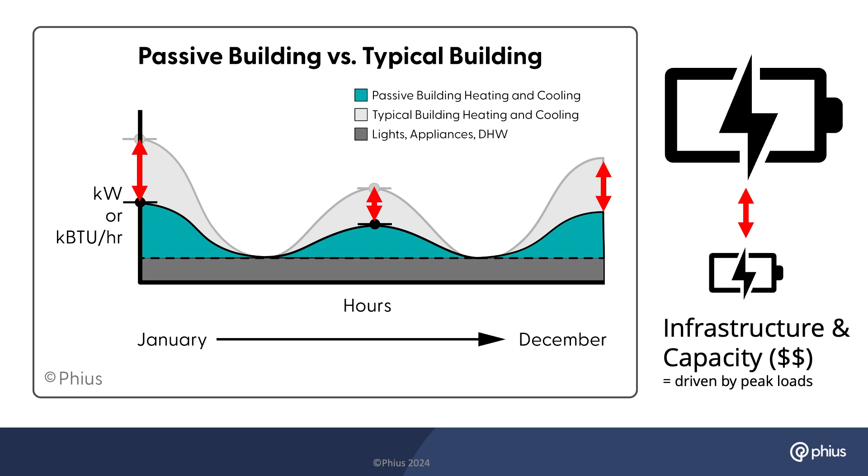So this is really the cool thing here. If we really crush all of our loads, we can feasibly scale up what we need in terms of electrons through renewable energies, and that's what we want to do. We want to crush the CO2 emissions and the cost.

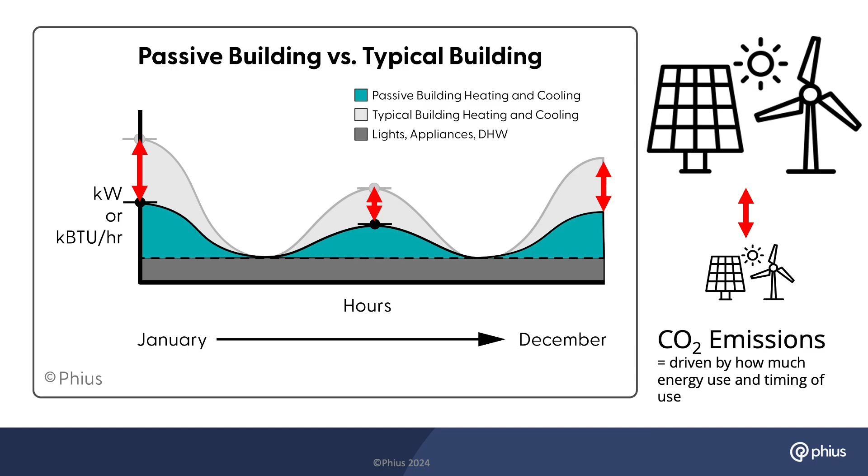I will not talk in detail about these principles. Happy to distribute this presentation later. Those of you taking this, I'm assuming it's a requirement, like systems classes, you're familiar with continuous insulation, no thermal bridges, airtight construction, heat recovery ventilation, solar gain, managing summer and winter, and picking the appropriate glazing package for your climate.

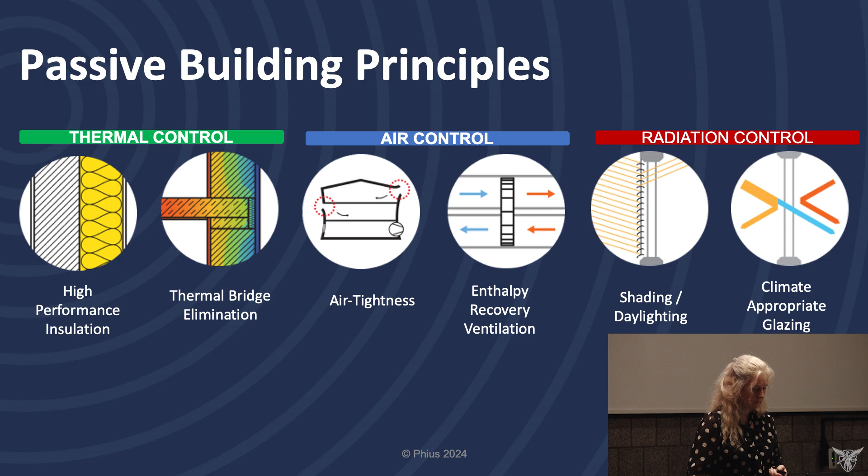Now a little bit on the certification framework, and I'm sorry I'm hitting you with this, but it's really important because if you just employ these principles I showed you by gut feeling—like, okay, tons of insulation, this window looks good—but you don't have anything that gives you a limit on the different combinations for your particular climate, you can totally overdo it or underdo it, or worse, do something that makes it even worse than intended despite good intentions.

So it's very important to differentiate between those principles. These are essentially your strategies that you can pick from, your tool set, but you also need hard and fast lines that tell you how much insulation to layer on and where to stop. This is what these targets are for. And to do this correctly, you need essentially three kinds of frameworks that limit you.

One is the space conditioning targets—by that I mean heating and cooling total consumption per year. Then the peak for heating and cooling, because that determines how big your mechanical system has to be to keep your building comfortable. And then you want on-site quality assurance. Anybody here who has built buildings before?

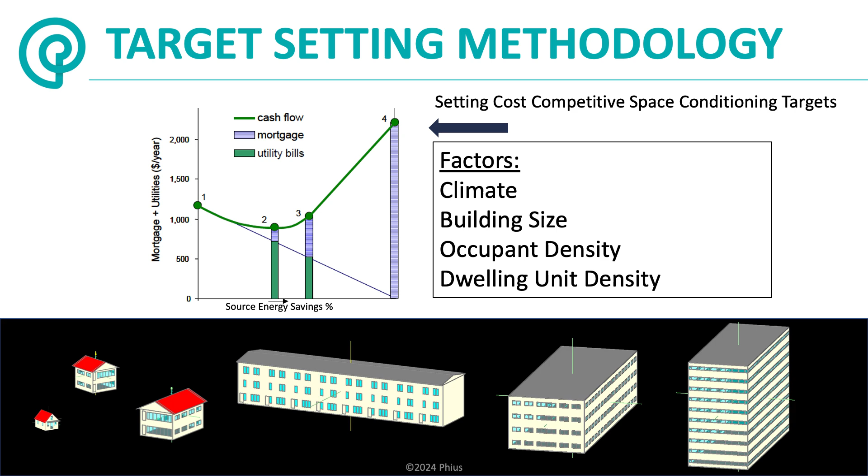Building size and occupant density make a big difference in where the sweet spot is for setting insulation levels. This is good news because the bigger the buildings—my favorite right now are high rises—the less insulation you need. You can already get very close to passive building standards with big buildings, almost at code level. It's not easy, but it is easier.

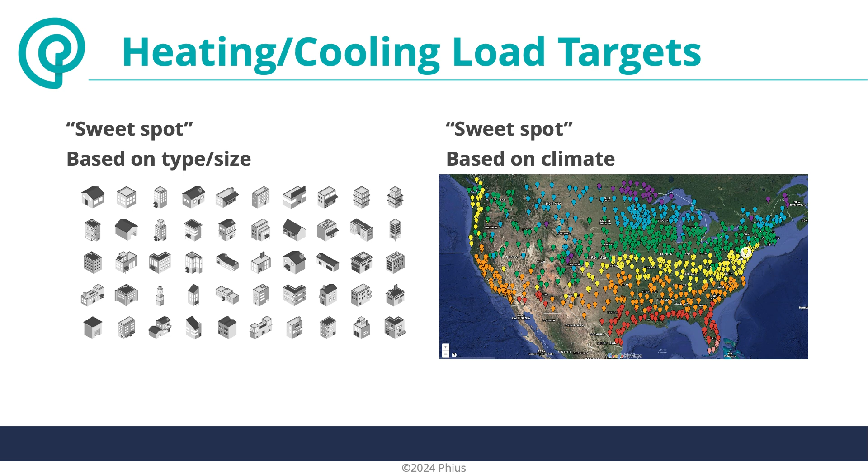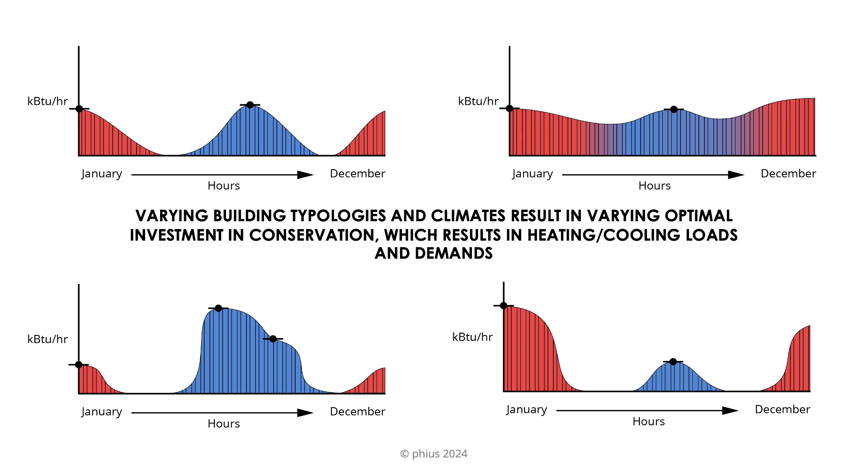Heating loads have a sweet spot based on building type and size, and we have targets for every different climate zone. That funny diagram where we squish down the loads looks different for every climate. In some climates it's much easier; in some, heating dominates, in others cooling dominates. From the specific climate data, these different load profiles result as you try to squish it down.

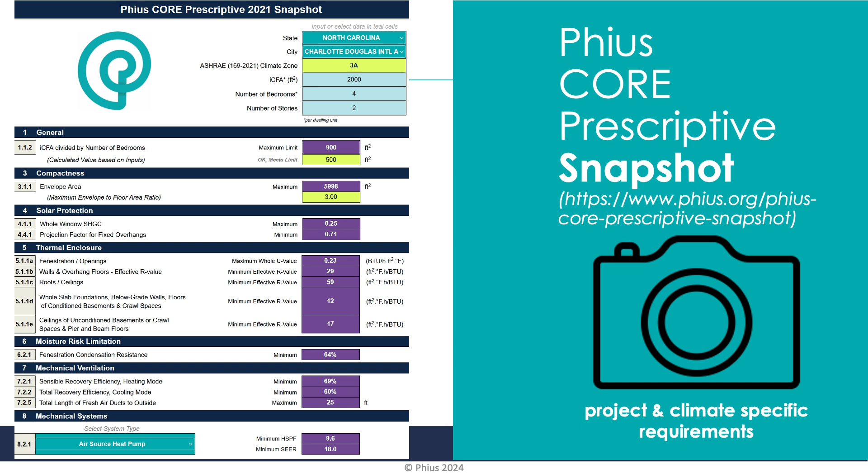Over the years we've realized that very small buildings don't have much budget for energy modeling, and single family home builders wandered off thinking it was too expensive. So we came up with a prescriptive calculator. Go to our website—there's a cool little calculator. You pick your climate, pick the size of your single family home, and it spits out what you need to put into your envelope. It's a nice shortcut if you don't want to get into all the details of modeling.

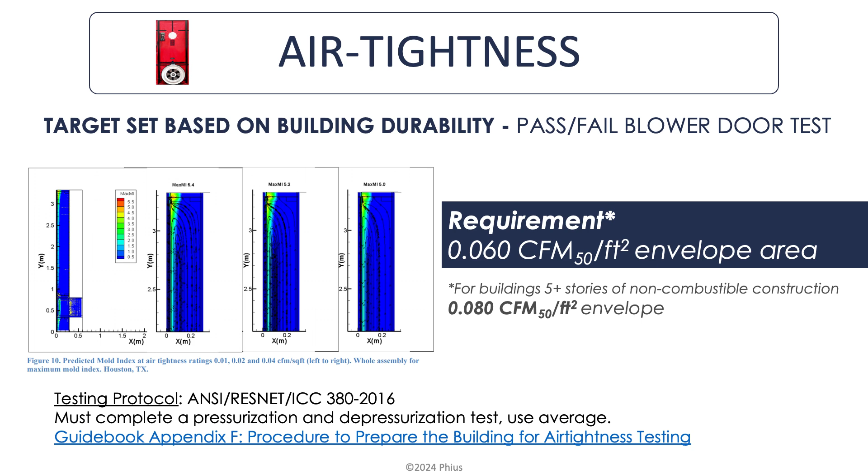Now we've gone back and actually looked at what is the best level of airtightness, and it has something to do with your structure—whether you're building out of something that can fall apart, like wood affected by water, or steel, which could rust if moisture gets to it at a cold surface. This is the air tightness criterion: build the building as tight as if it would float in the ocean, as one of my friends said. The reason is, of course, you don't want to leak energy, but more importantly you don't want moist air from the inside traveling into the wall and destroying your envelope.

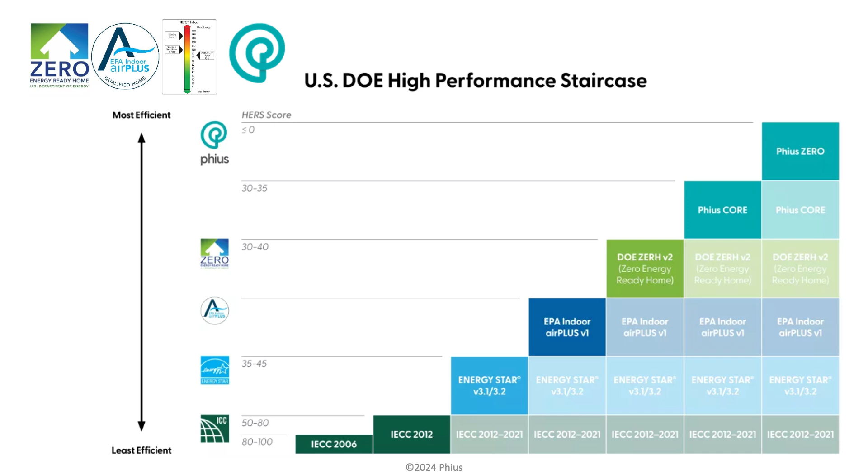For quality assurance, we partner with the Zero Energy Ready Home program of the Department of Energy, the Energy Star Indoor Air Plus program, and ResNet. Together these programs have really good guidelines for quality assurance, and we've incorporated all of them into our certification process. The cool thing is, since these are prerequisites, you automatically qualify for incentives.

Too many numbers, but this is just a reminder: when you design a super insulated building that is very tall, floor to ceiling, it's very important to have the right glass—insulative enough in a cold climate so no cold draft develops in front of it. You might have experienced this in crappy buildings: in winter you sit in front of a window, the surface is really cold, convection develops, and it's not comfortable.

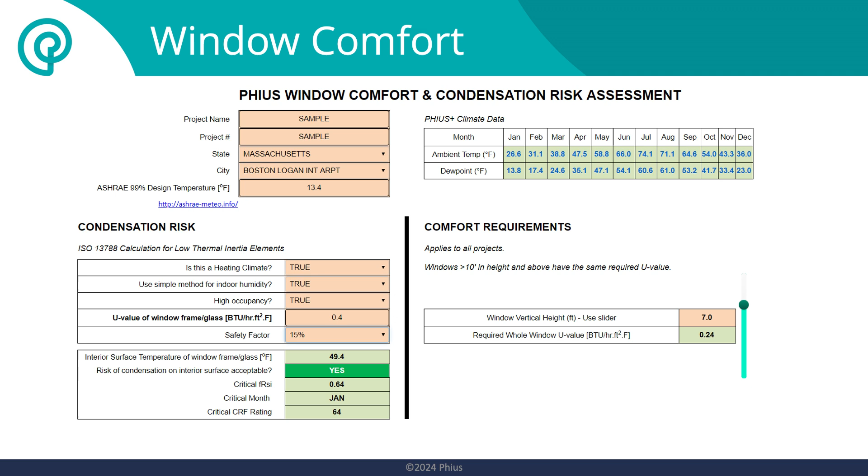You can pick a window, and it will tell you which climate it is good for. We have a prescriptive guideline for how to design your wall assembly.

Have you gotten into hygrothermal design yet? When I was in school, that thing gave me a headache. I'm like, oh my God, this sounds really important, and I don't want any water on my wall, I don't want any mold. But I found the principles behind it very difficult, especially as you try to move them through different climates. But in general, you can make up some pretty standard prescriptive rules that keep you out of trouble.

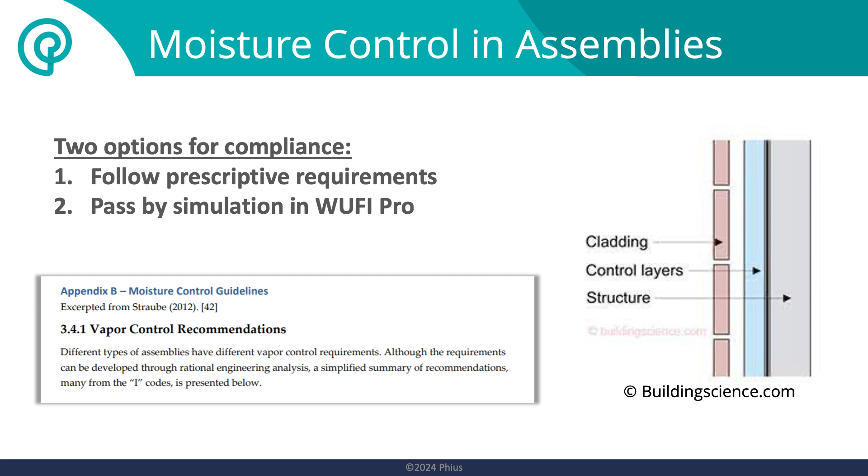We put this into Appendix B in our guidebook, but in general, you can also clarify it by looking at the roles in the wall. Joe Lstiburek from Building Science Corporation has done that in a very exemplary manner. There's the cladding on the outside, and then the meat of the wall - you categorize them by layers, by the control layer. There's a thermal control layer, a water control layer, an air control layer, and then the structure. So if you think of it as a layer cake, and you understand what the roles of these different layers are, you're good.

And this is my favorite topic, thermal bridging. If you're a real geek and you get into therm calculations, especially for retrofit construction, you probably will have to do this more than for new construction, because new construction is simple. In new construction, you just take the prescriptive requirements for the wall assembly, and you design your building to be thermal bridge free.

Hello. Now you don't have to calculate them. That's what you should be doing.

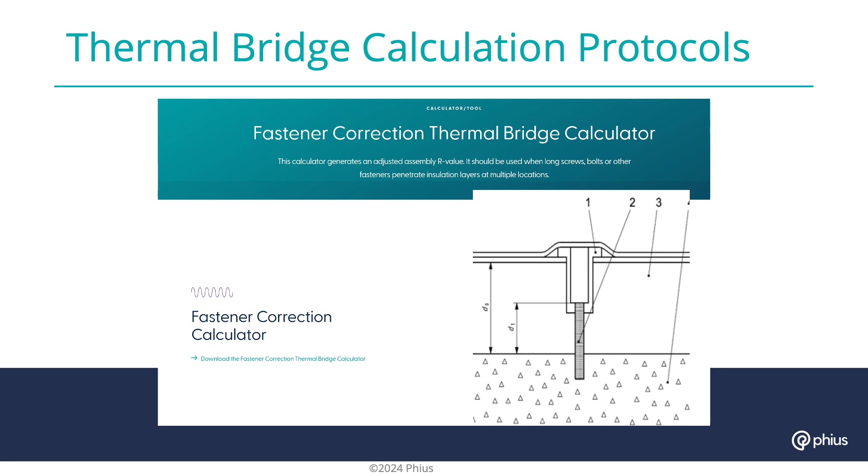But in retrofit scenarios, you can't. An existing building has thermal bridges everywhere, and the way you deal with them, you will have to calculate them to put them into the energy model correctly.

All right, so all that building science stuff and design and the system, how to design and model it - now we're getting to Phius as baseline on the path to zero. So now we have designed and optimized our envelope for the building, and to do so, we give you certification processes. So you're not alone, you can send us your drawings and we're going to look over everything you did, because chances are if you do it for the first time, you're probably not doing it correctly. So certification is always a good idea. We're basically like your super team members who help you through it all the way to final certification. And these certification processes exist for all the different building typologies, for housing, for commercial, for new construction, for retrofit.

And we have the baseline. If you don't have the money yet to put all the renewables on it to get all the way to zero right away, or you can go to zero right away, and that certification we call Phius Zero. And you guys are Phius Zero, right? Yes, you got the Phius Zero plaque. Congratulations.

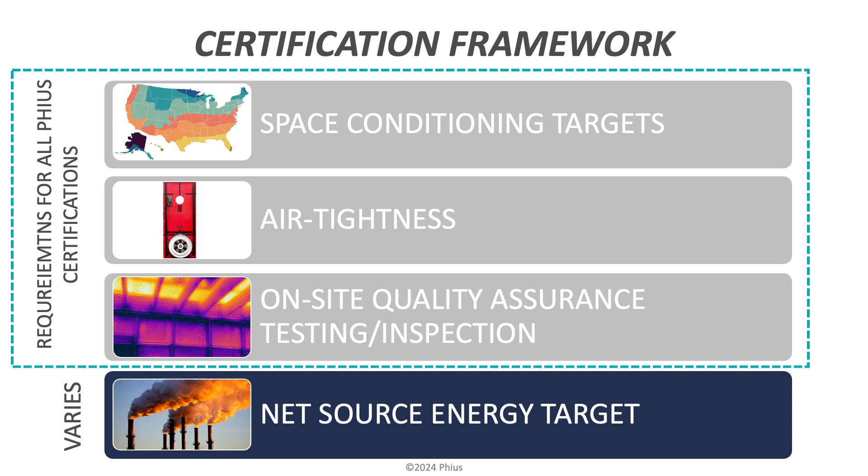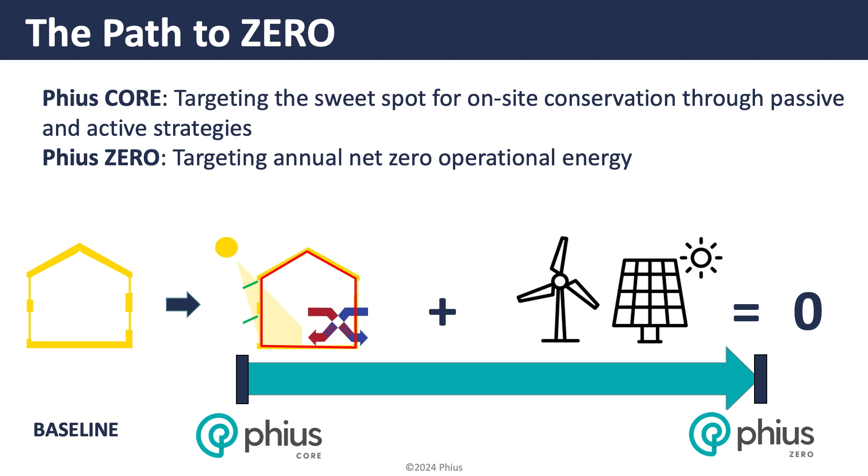And the idea, obviously, that last little criterion here in our calculations tells you how much source energy your total building is allowed to use. That's actually really quite important, because only if you know that level of what it is still using once you are done with all your optimization, can you actually calculate how many photovoltaics you need, or windmills, to take it all the way to zero, to carbon neutrality.

This is probably not that important to you unless you really do it, but we do have rules in our certification process to take the building all the way to be electrified. Right now you can still use gas, and in big buildings people still choose that, but if they do, we ask them to have a fuel switching plan for the future.

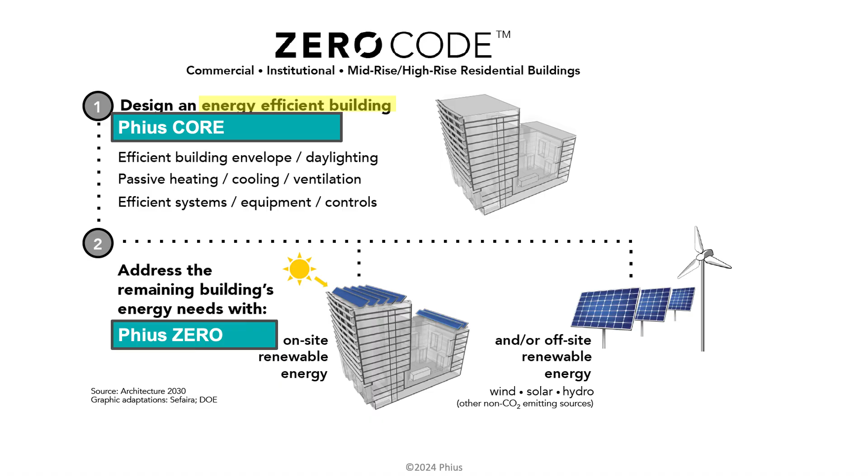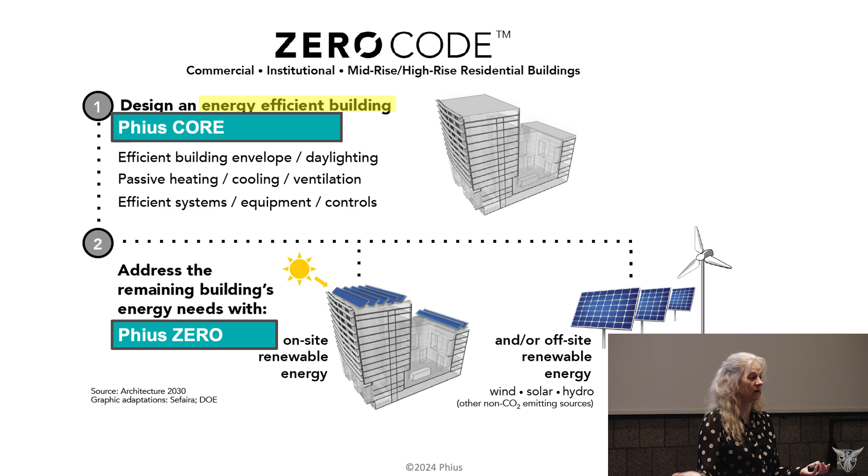Some of you might have heard of the Zero Code brought forward by Architecture 2030. They just use the ASHRAE 90.1 as kind of a baseline for efficiency. We say, hey, no, not good enough, you have to go further. So in our opinion, this should really be Phius Core, because we specifically optimized this to be the sweet spot between conservation and generation. And then yes, we agree, to get to zero you add your renewables, and that can be on-site, but it can also be off-site. So you can buy solar renewable energy credits to zero out your remaining operational carbon.

All right, now we're getting to the pictures.

Initially, this whole thing got off the ground from 2002 to 2010 with various single-family projects. I started single-handedly, like we built the Smith House in 2002, finished in 2003, and somehow people heard about this. We built a couple more as a community housing development organization. Actually, Phius was first a community housing development organization.

This was also not unrelated to Ball State, because there was a lot of activity around that, the Housing Futures Institute back when, and we were on site a lot, checking out affordable construction. So I was like, well, this seems like a great idea, buildings that don't use any energy for people who don't have a lot of money. Let's do that.

That's how we started, and then people found us and said, hey, this is cool, can you teach us? Like, now what? So I put together a curriculum and started jetting around, from east to west, stopping in the middle, and started teaching builders, energy consultants, engineers, and architects on how to do this kind of stuff.

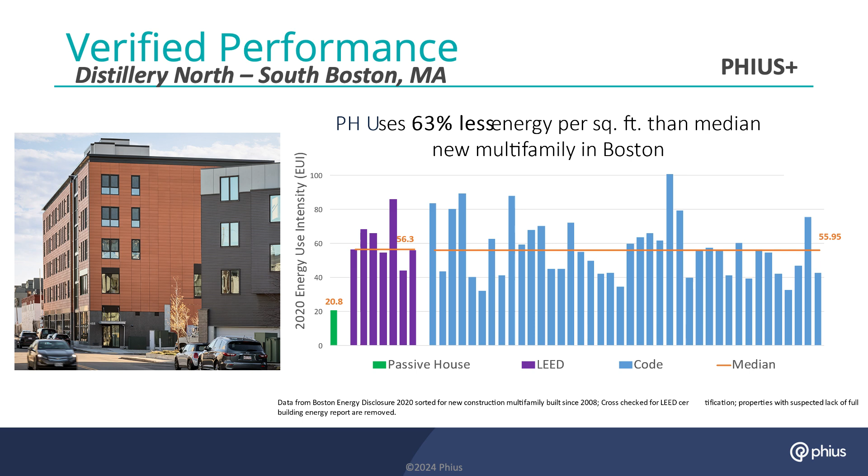Then they went ahead and said, well, but what about cost? We're sure this costs a ton more money, right? We said, no, we cost-optimized those targets. And they're like, okay, fine, we believe you. There was the political will there, and they said, we'll pick 8 projects and give them a whole bunch of money.

They build to your standards, and in return they give us all the construction data and cost data. They did this, and voila, proof of concept.

Out of those 8 projects, on average there was one outlier with 4.3% additional cost, but the rest averaged between 2 or 3%. That's totally understandable with a new team—you have to think differently about how you do things, so there's a learning curve. If a team does a project for the first time, it will probably cost a little more.

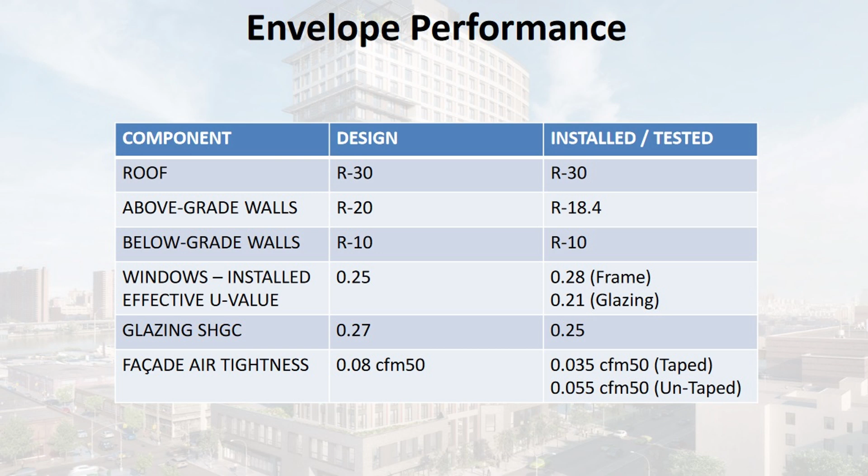This is one of our high-rise projects. If you look at the R-values here, it's really not that bad—you have a bigger envelope, so the R-values and window requirements are just a little bit better than code. So really it comes down to the quality of install, no thermal bridging, air tightness measures, all that good stuff. And it starts to get really fun.

In a single family home with a little ventilator, you can kind of picture this, right? But what if you have a 26-story high rise? Now what do you do with the ventilation? It's not what you know from regular buildings—you need low flow ventilation. So it's a little bit of a technical feat.

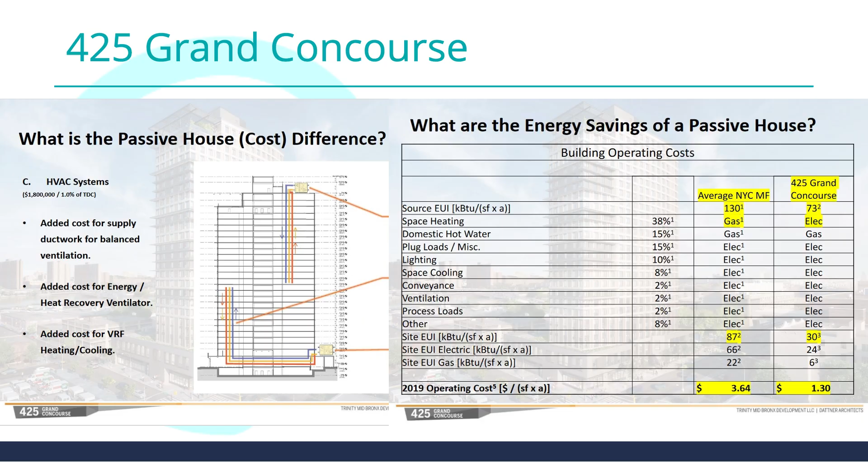And then this project, again, it's affordable, beautiful apartments, with an immigration background in that neighborhood. It's in the Bronx, 12 minutes from LaGuardia if you're ever there—remember, 425 Grand Concourse, very cool project. They had a local artist make art and put it up in the common spaces.

This is the NYSERDA team. I was very happy to finally be there, and there's a common roof terrace with Manhattan in the background—it's just ridiculous. The cab driver was like, 'Wow, what are you doing here?' I'm like, 'Well, I'm visiting this, this is an affordable building.' He's like, 'Can I be in this building?' I'm like, 'Yeah, you should research this—it's not super expensive. Well, for New York, still probably up there, but.'

Anyway, so the success story is stretch code, local law 97, basically passive opt-in stretch in Mass—now all multifamily buildings have to be built to the Phius standards in Massachusetts that are larger than 12,000 square feet. We're expecting about 200 large-scale multifamily projects out of Mass for certification.

And then, because we didn't trust that—belt and suspenders—we also decided to turn our design guideline into an ASHRAE standard that then doesn't even need us. The building inspector can just require you to do ASHRAE 227P, and then basically people have to meet passive building standards. Lots of incentives out there, also for retrofits.

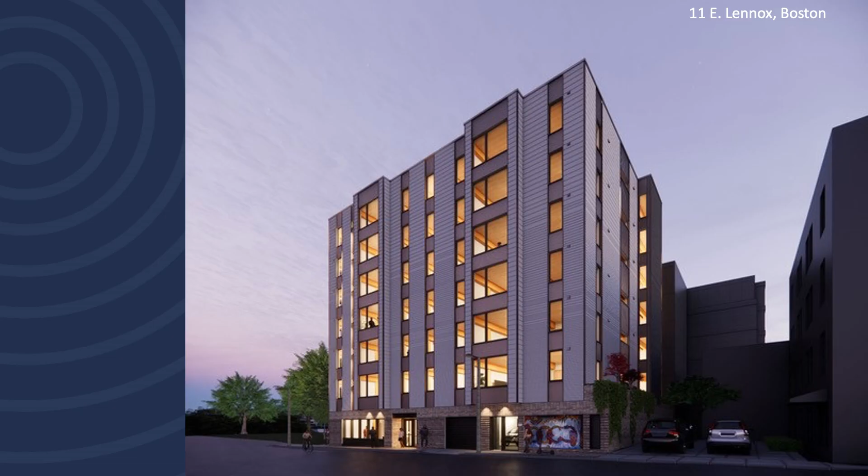This is one of the most recent ones completed in Boston—it's a CLT project. And then even sleepy Chicago, which is always a little behind, watching the East and West Coast like 'huh, what are these people doing over there,' finally finished their first multifamily affordable one within the city limits. Yay! And it only takes one.

And then way back when, for all commercial buildings, for those of you who enter commercial buildings—Rocky Mountain Institute, Amory Lovins, one of my heroes, a physicist at the beginning of this whole movement of environmental construction and building technology. In 2015, he finished his new Basalt headquarters for the Rocky Mountain Institute.

And that was right when we had reconfigured our climate-specific standards. I was like, Amory, can we try our standards on your building? He had 70 experts—economists, physicists, and whatever—to come up with a sweet spot for his envelope, and we ran it through our model. Bingo, it was a perfect fit. We're like, yes. So we got the guideline, and we got the guidebook for that. Lots of...

In academia, lots of people are now building residence halls to our standards—a whole bunch in Princeton, Harvard, all over the place in the Northeast.

This is one of my favorite projects, most recent in Chicago: the Academy for Global Citizenship. This is a positive energy building designed to teach kids from kindergarten up. They have permaculture gardens—it's a zero water building, everything, the whole thing. It is also a Phius Zero project.

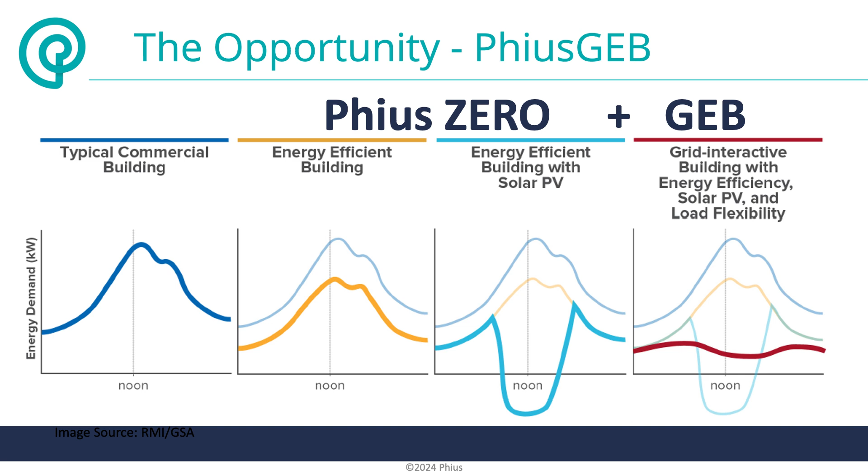It's all going back to the loads, and this is the cool story: with passive buildings and load flexibility, we're reaching our goals, and there are incredible savings to be had.

Others are taking note. They're basically saying efficient, grid-responsive buildings would make a zero carbon grid 100 billion dollars cheaper per year. The numbers of how these synergies ripple are incredible. That's the next frontier I want to crack.

There's already one six-unit building, kind of like a microgrid, on the ground in Maryland, but they haven't gone all the way to where I'd like to take it, at a bigger scale. Lisa White, our newly minted co-director, wrote an architect's guide for ultra-low energy buildings, microgrids, and direct current. Again, this is totally projecting into the future—except for this six-unit house, we don't have any of this yet.

So, in case you're starting your own socially impactful entrepreneurial business, which I strongly encourage you to do—if and when you get your hands on a larger development like this, this is the J.J. Carroll redevelopment in Boston, that's the perfect size.

Then you optimize all of it, you gang everything together in a microgrid. You have all the appliances running on direct current so you don't have losses, because renewable energy is direct current—so why are we going back and forth converting it? Then you have one connection to the grid, and that community could sell their overproduction to the benefit of all.